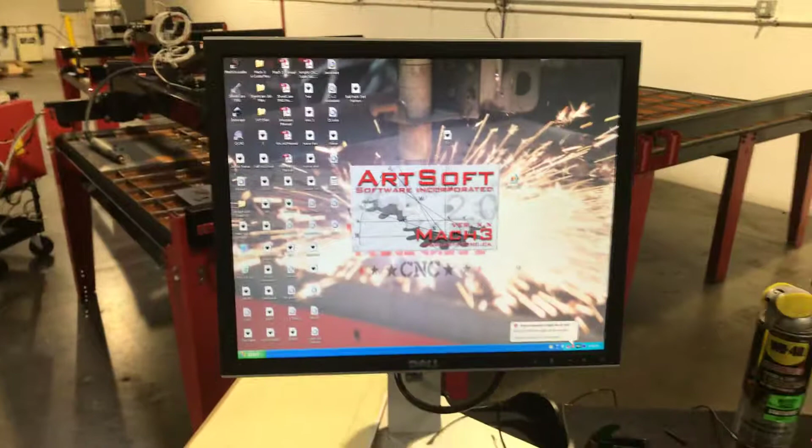All right, that took a half a second, but I do recognize what's going on now. Your z-axis is just backwards. Simple to fix. First thing, we're going to go ahead and flip that red and yellow wire back to where it was, because it's all a symptom of one small adjustment that we need to do in the system. I'm going to go ahead and open up Mach 3 here. Follow me, if you will, and we can get this all fixed up.

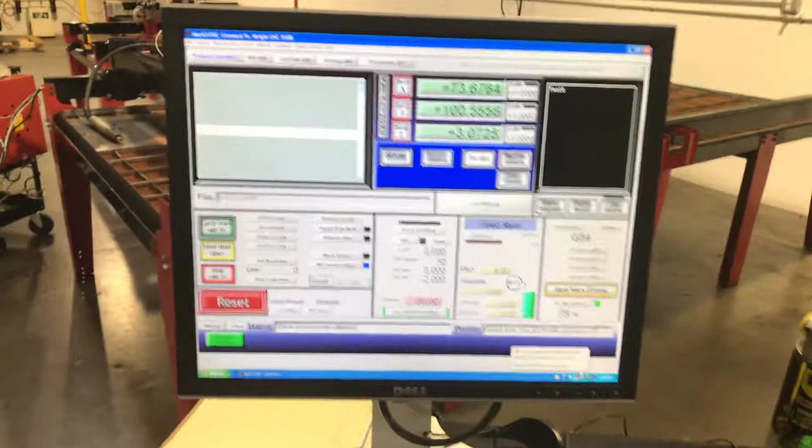So the reason that it's continuing to drive itself up is because it's actually trying to go down. If you were to look at the way that the numbers on the z-axis run, it thinks that it's going down when it's going up. There's your issue there. Let's go ahead and break it down.

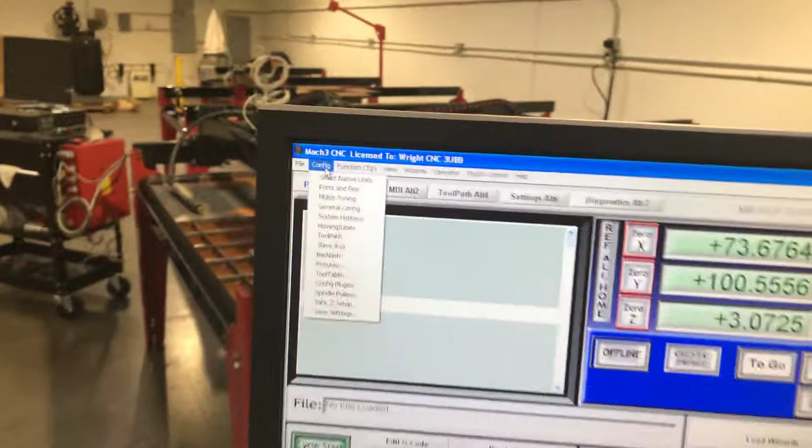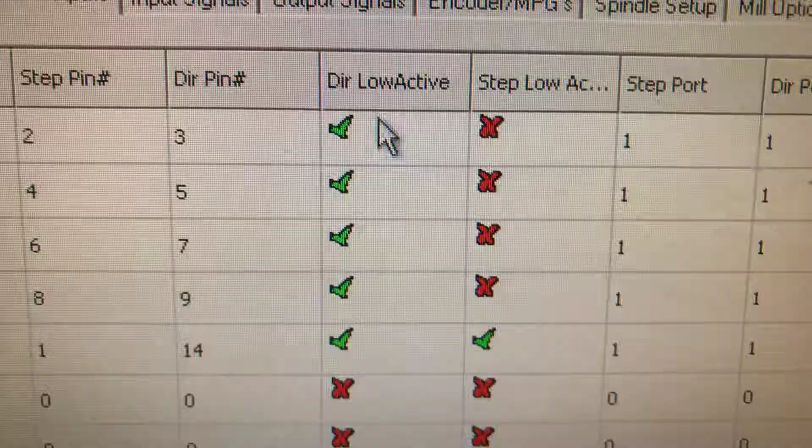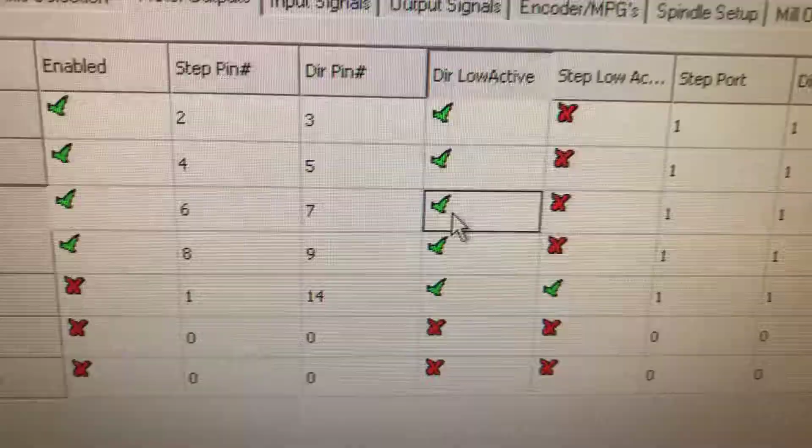All right. All we have to do is go into config here at the top side, config, ports and pins. We're going to go to motor outputs, z-axis here. And we're going to go to the DIR low active here on the Z-axis. I'm going to disable it or enable it. You're going to essentially take what it's set at currently and click for the opposite. So you're just going to click on that once to switch it.

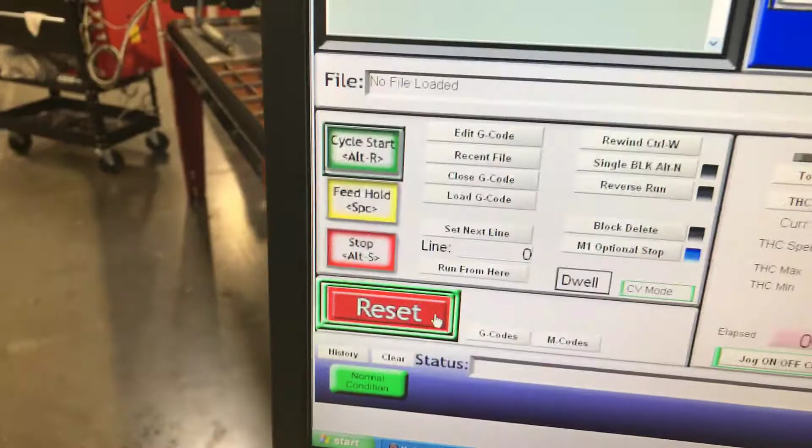It may be different from mine, as we have switched motor suppliers and they are wired for a separate polarity. So one may be the opposite of the other. So we'll go ahead and click on that and we'll hit OK. It'll ask for a reset, and then you'll be able to hit your page up and page down in order to get it to go the correct direction.

Now, the reason I said switch these wires back is because it was sending the correct signals to Mach 3. However, Mach 3 had the z-axis flipped. So of course it would be going up when it thinks that it should be going down. That should get us back on track.

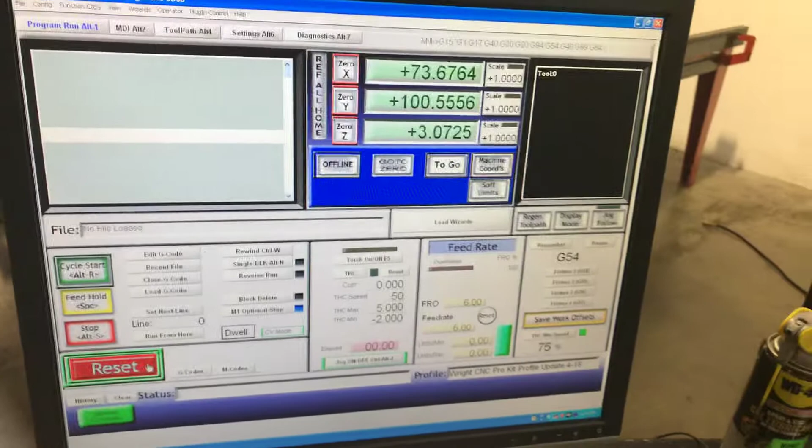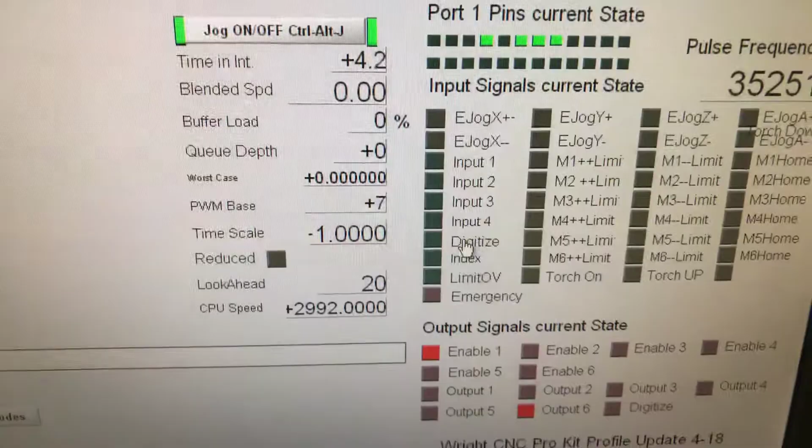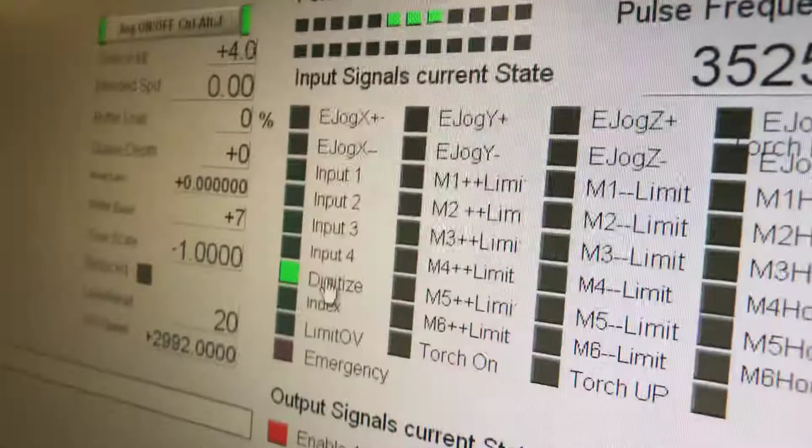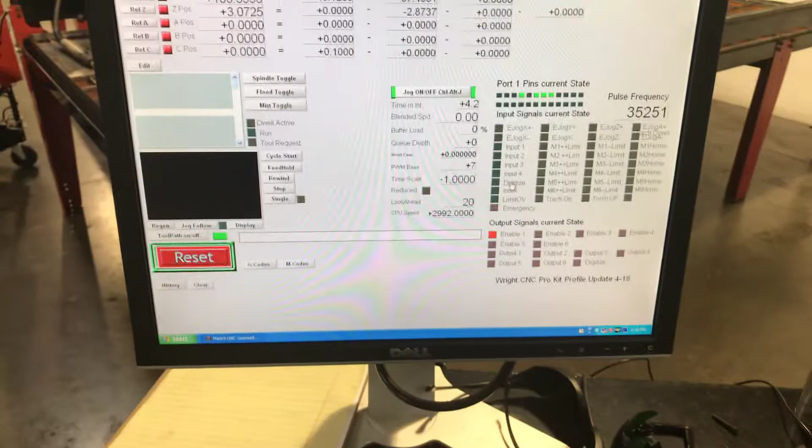And then, before we do finally get running again, I do want to make sure that the digitize button is working. And the way we test that is we lift the head. And when we lift the head, we'll see on the screen, let's see if I can get this to do it, we'll see that the green digitize button right there actually lights up for us. So that should get you going in the right direction. Run this, give it a shot, and we'll figure it out from there.

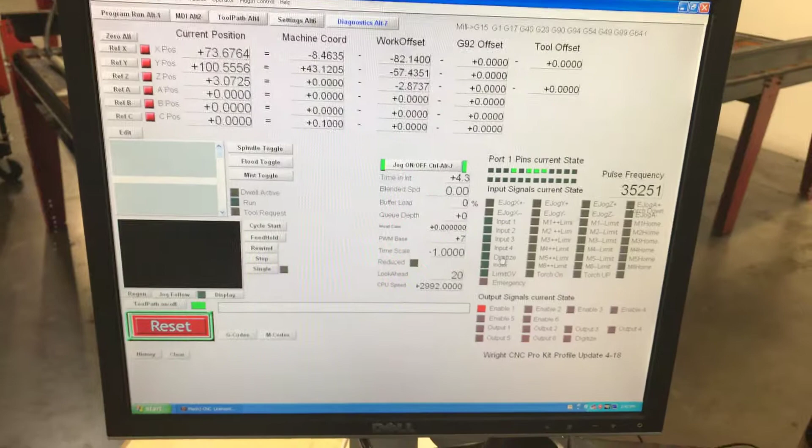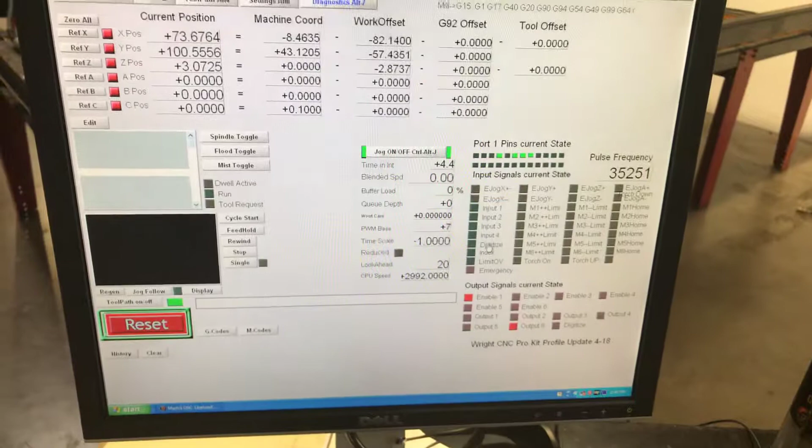The other aspect to this is I'm going to need to have the THC voltage potentially adjusted a little, but we'll get to that. It may need to go down a couple of volts, back to our 101 or our 99-ish, but I wanted to get a feel. Maybe back down to 105. Yeah, let's try the 105.

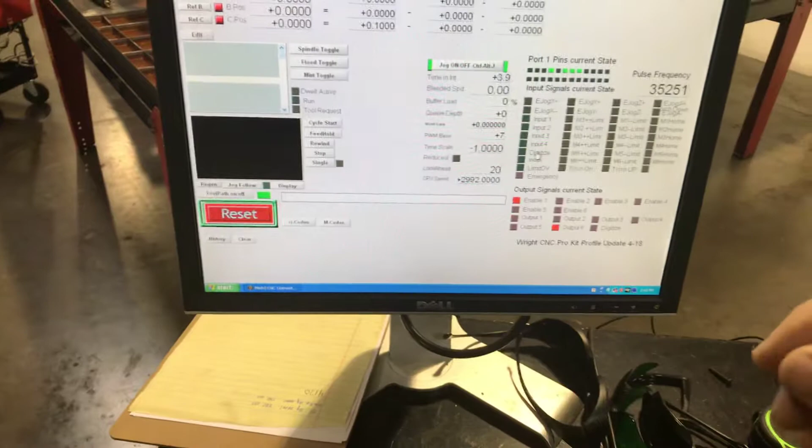It's not cutting through the material the way you want, and the way that the kerf is, and just from the video you can see that the torch is much higher than 1/16 of an inch off the material, and we only want about a 16th when we're looking at it and adjusting the THC. We only want it to be 1/16 of an inch off the material throughout the entire cut.